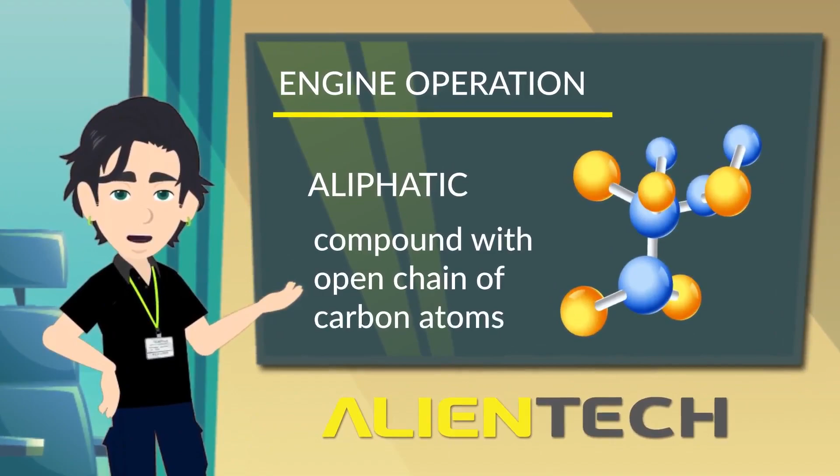Let's start by defining that diesel is a mixture containing aliphatic hydrocarbons from 13 to 18 atoms and paraffins. By aliphatic, we mean a compound in which molecules are made up of an open chain of carbon atoms. Paraffin, on the other hand, is a substance that freezes below 2 degrees Celsius, creating problems with the flow of diesel to the engine.

This prevents the fuel filter from functioning properly and clogs the fuel and injection ducts. If this problem occurs, it would be necessary to wait for the hottest hours of the day to start the engine. There are also additives, such as antifreeze, which dissolve the paraffin, making the diesel more fluid.

Keep in mind that fuels often contain impurities that filters are unable to completely retain. Therefore, the injectors tend to get dirty and clogged. If this happens, injection does not occur regularly, and we could encounter problems such as excessive fuel consumption, loss of performance, increase of harmful substances in exhaust gases, irregular idling, difficulty starting the engine, and in the long run, serious engine problems.

Consequently, we understand how important vehicle maintenance is in preserving the reliability and longevity declared by car manufacturers.

Diesel engines exploit compression to spontaneously ignite the air-fuel mixture. This is the theoretical basis of the process that initiates combustion. The engine needs a certain amount of air and fuel inside the combustion chamber in order to start combustion as efficiently as possible.

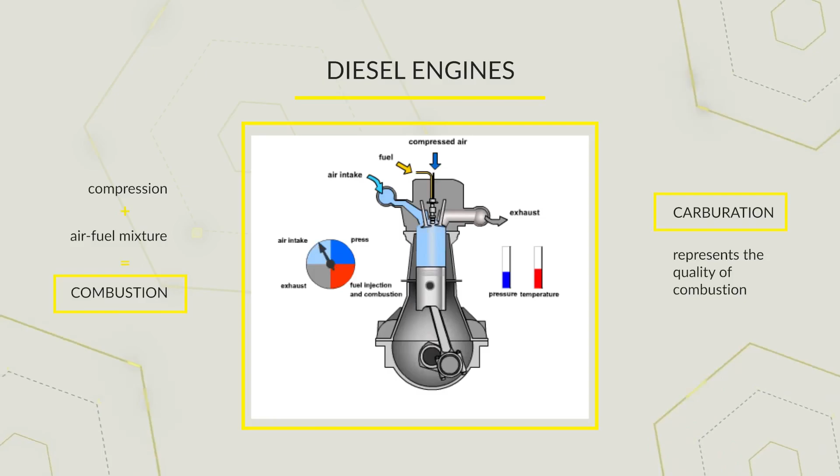To correctly balance the chemical reaction, we have a specific air-fuel ratio, which we represent this way. This simple division defines the mass of air necessary to completely burn a certain amount of fuel. This value is called the stoichiometric air-fuel ratio.

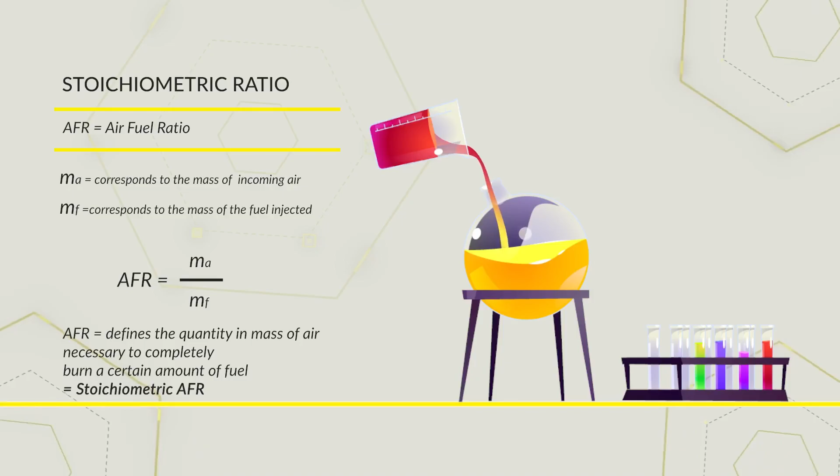By changing the fuel, there will be different stoichiometric, ideal air-fuel ratios. For diesel engines, this value corresponds to 14.5. So, to have complete combustion in a diesel engine, we need 14.5 kilograms of air to completely burn 1 kilogram of fuel. Translated into milligrams, we respectively need 14.5 milligrams of air for each milligram of fuel.

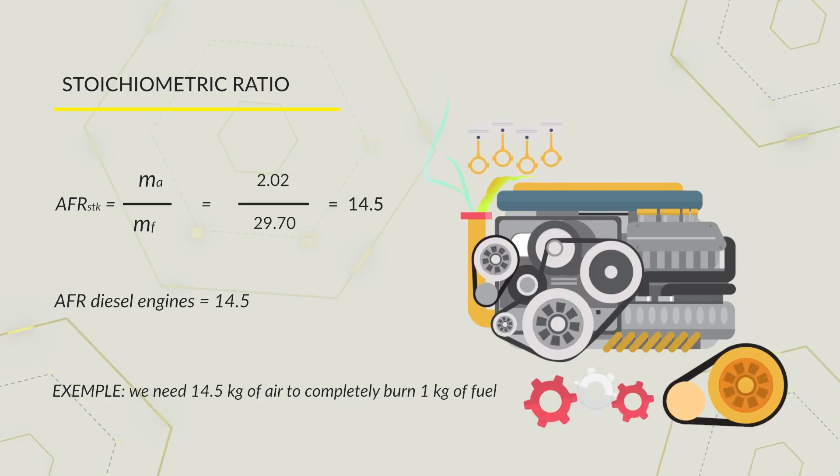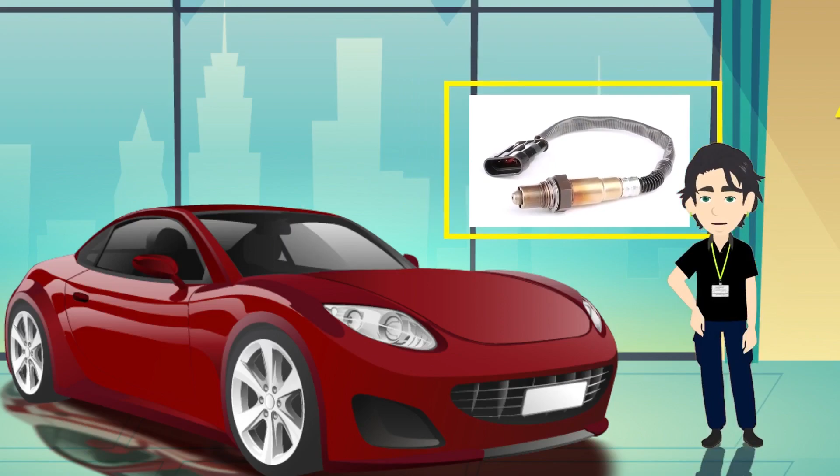Now you are probably wondering how our engine control unit measures these values and understands the amount of fuel needed. Simple: thanks to a sensor positioned in the exhaust manifold that measures the oxygen present in the exhaust gases, called the oxygen sensor, or more commonly the lambda probe. The percentage of oxygen remaining after combustion is detected, allowing the control unit to instantaneously calculate the so-called instantaneous air-fuel ratio, which defines the air-fuel ratio.

This allows the engine control unit to determine if there is excess air in the mixture, or if there is too much or too little fuel injected. The ECU reads this measurement and continuously adjusts the amount of fuel injected to keep the mixture as close as possible to the stoichiometric air-fuel ratio value, corresponding to 1.0.

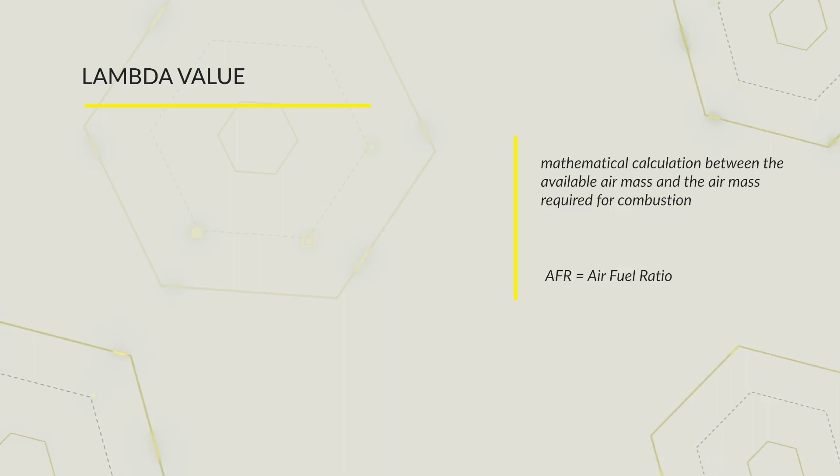The lambda value, by definition, is a mathematical calculation between the available air mass and the air mass required for combustion, calculated as a division between the instantaneous air-fuel ratio value and the stoichiometric air-fuel ratio value.

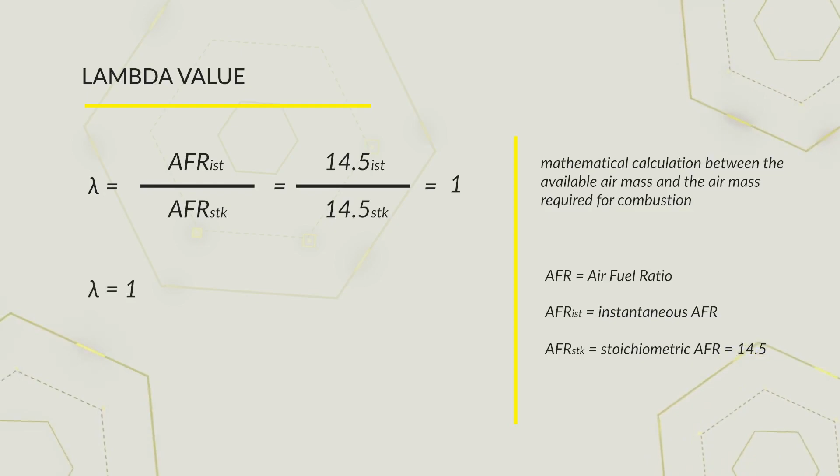Let's list in detail the lambda values that the ECU can calculate internally. Lambda equals 1 occurs when combustion is stoichiometric, or rather, all the fuel participates in combustion.

Lambda is less than 1: in this case, we have an excess of fuel, meaning unburned fuel in the exhaust gases, which creates more pollution. This is called rich carburation.

Lambda is greater than 1: here we have an excess of air compared to the injected fuel, and consequently high temperatures and a higher concentration of nitrogen oxides. It is defined as lean carburation.

Perhaps an example will help you better understand how the air-fuel ratio works, allowing you to apply the formulas discussed above.

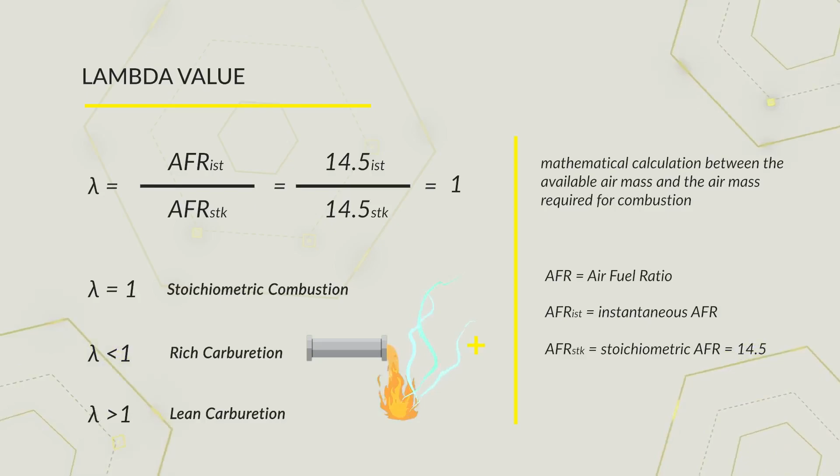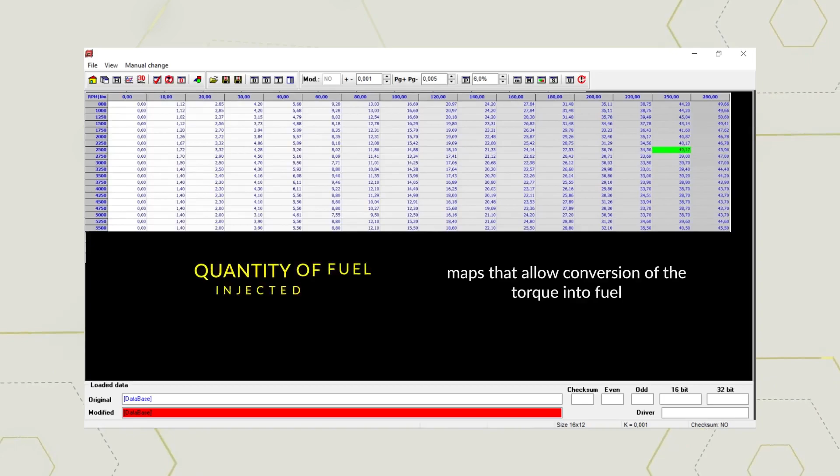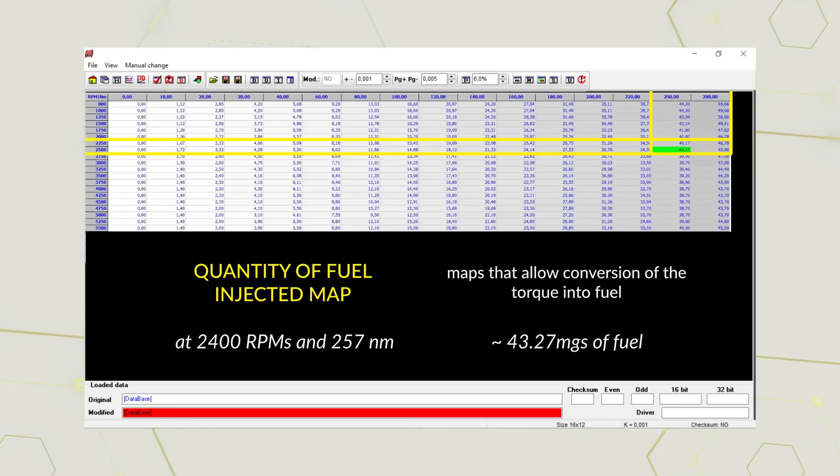We now understand how much fuel the ECU must control according to the engine torque to be generated. We check the maps that allow conversion of torque into fuel, called quantity of fuel injected. At 2,400 RPMs and 257 Newton meters, by interpolation between columns 250 and 280 Newton meters and lines 2,250 and 2,500 RPMs, we find about 43.27 milligrams of fuel.

Now let's open the map called quantity of air, which allows us to understand better. For 2,400 RPMs and 257 Newton meters, we find about 989.018 milligrams per stroke, by interpolation between 2,250 to 2,500 RPMs and 240 to 280 Newton meters.

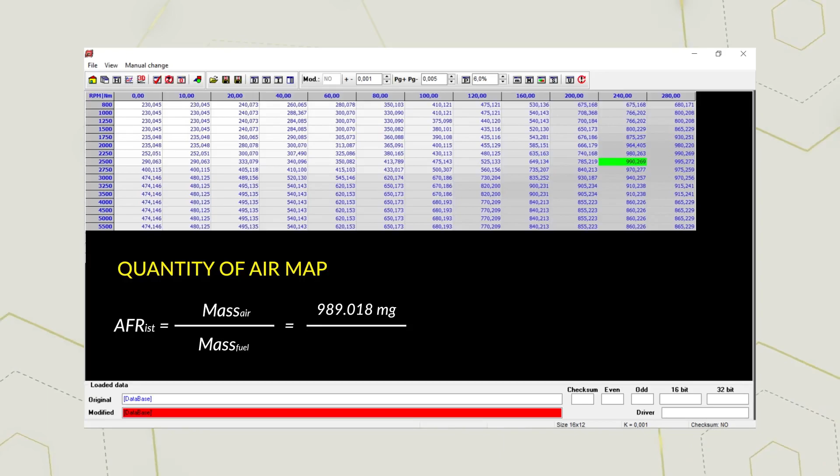Now let's apply the formulas seen above, dividing the milligrams of air we found, 989.018 milligrams, by the amount of fuel used, 43.27 milligrams, to get the correct instantaneous air-fuel ratio at 2,400 RPMs with 257 Newton meters. Now we can get the correct measured lambda value instantly, that is, 1.575.

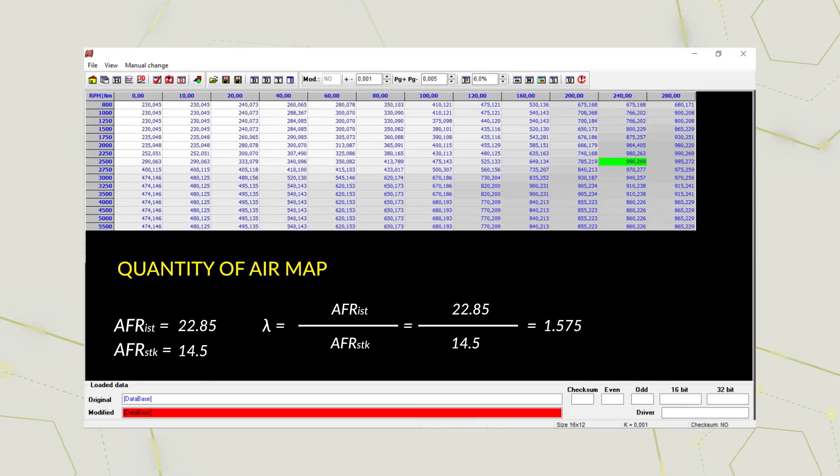You should know that one of the main problems of diesel engines occurs when the carburation is excessively rich. This means there is a lot of fuel in the exhaust gases. As a result, a very high level of particulate matter is formed, which would prevent automotive groups from complying with emission laws.

Conversely, using too lean a carburation will tend to produce more pollutants, such as nitrogen oxides. This carburation in some cases could also cause relatively low performance, as well as possible engine damage.

According to the various operating conditions, the ECU can mandate other injections in addition to the main one, in order to enrich or lean the carburation. Since this is a fundamental topic, we will better analyze the pre- and post-injections in another chapter of our training course. But it is important to understand why the ECU can use various carburations: to reduce emissions in order to pollute less and comply with emissions laws.

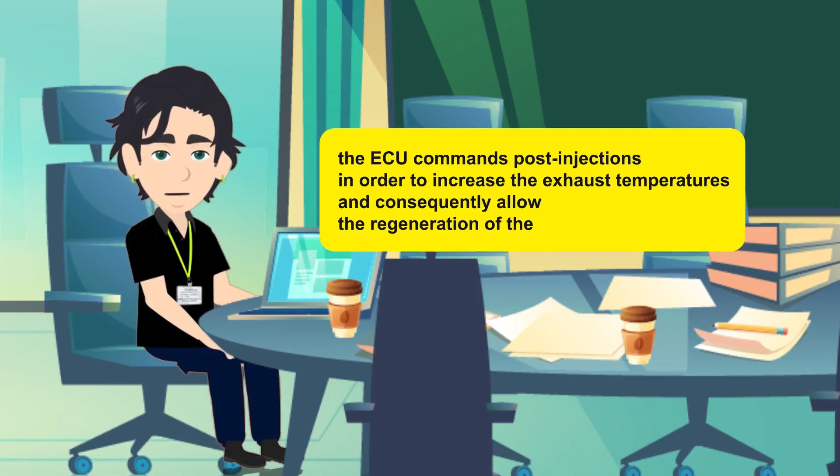The ECU commands post-injections in order to increase exhaust temperatures and consequently allow regeneration of the particulate filter. For consumption, if for example we stop at a railway crossing with the engine running, the ECU will try to limit consumption as much as possible by injecting less fuel.

To facilitate ignition, in the event of low or different atmospheric temperatures where ignition problems may occur, the ECU controls pre-injections by heating the combustion chamber to facilitate vehicle ignition. To increase or decrease the vehicle's performance, if we ask for more or less performance using the accelerator pedal, the ECU will command more or less fuel in order to increase or decrease performance.

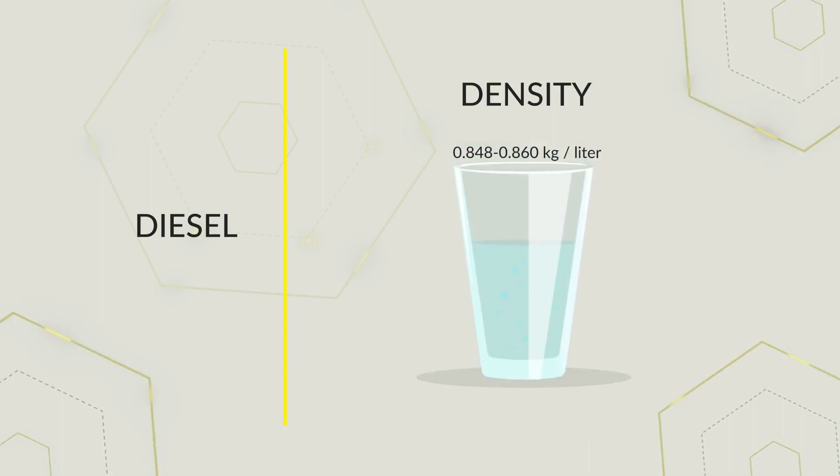Now that you understand why the ECU can use different carburations, let's talk about the treated fuel, which is part of the family of liquid fuels, diesel. The density is equal to 0.848 to 0.860 kilograms per liter. This means, for example, if we put the same amount of diesel in a glass of water with a density of 0.997 kilograms per liter, the diesel will float on the surface since it has less density, meaning it is lighter than water.

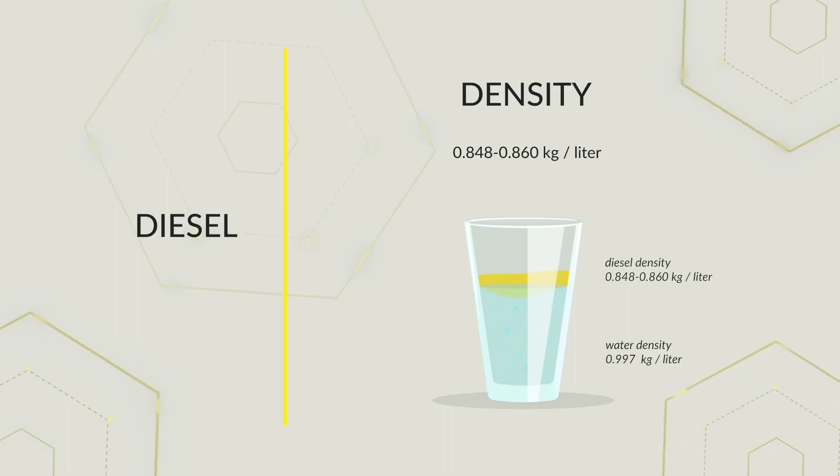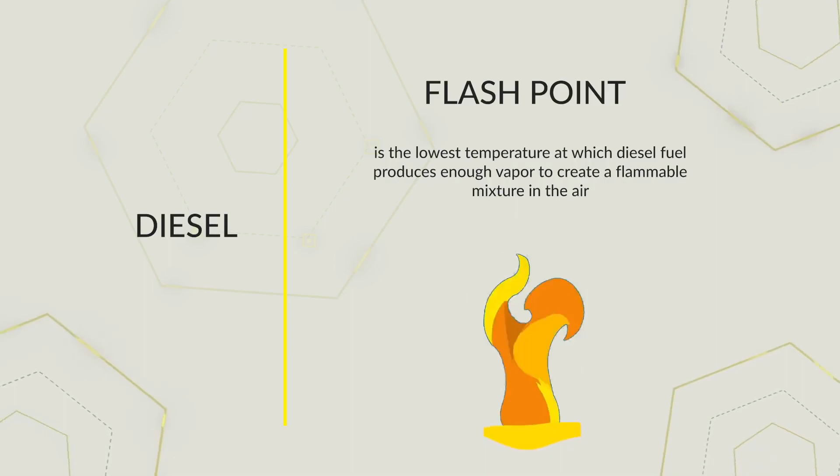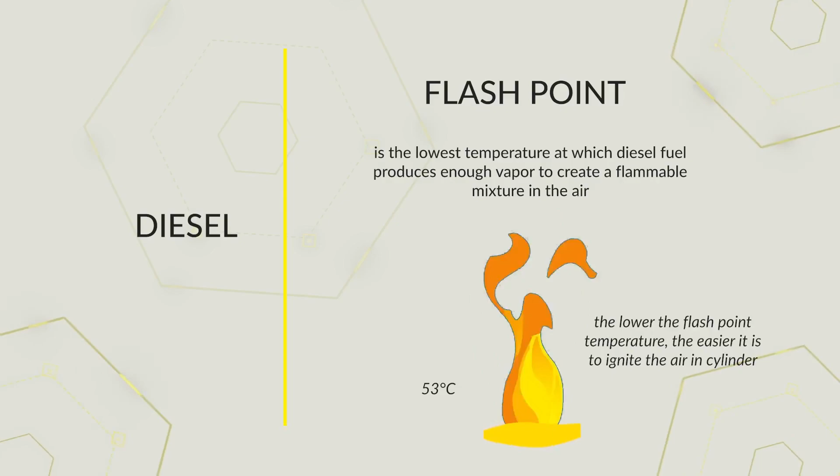The flash point is the lowest temperature at which diesel fuel produces enough vapor to create a flammable mixture in the air. The lower the flash point temperature, the easier it is to ignite the air in the cylinders. Conversely, the higher the flash point, the safer the fuel is to handle. For diesel, it appears to be above 53 degrees Celsius. So if the temperature of the diesel oil is lower than this value, ignition does not take place.

The calorific value is the quantity of heat, expressed in kilocalories, which develops from the complete combustion of 1 kilogram of fuel. The calorific value is the element that better than any other characterizes the value of a fuel. For diesel, it is 41 to 44 megajoules per kilogram.

Finally, the self-ignition temperature is the lowest temperature at which fuel ignites spontaneously in a normal atmosphere without a flame or spark. This temperature is necessary to supply the activation energy and thus start combustion. The temperature at which a chemical ignites decreases with an increase in pressure or oxygen concentration. For diesel, this happens when the temperature is higher than 210 degrees Celsius, about 410 degrees Fahrenheit.

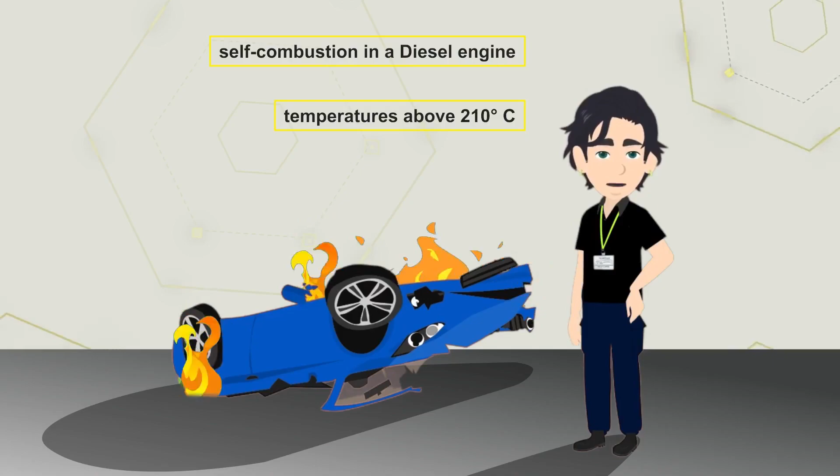Curiosity: when we talk about self-combustion in a diesel engine, it means that in extreme conditions, such as the vehicle overturning, breaking the turbine, excessive rise in the engine oil level, or a component near the fuel tank overheating and causing the fuel to reach temperatures above 210 degrees Celsius, self-combustion can occur. This is a very dangerous factor, since the flames become unmanageable as they are self-powered by the heat generated.

You must know that combustion in diesel is characterized by a lean air-fuel ratio to optimize engine operation. To avoid excessive formation of pollutants, the air-fuel ratio at maximum torque is usually kept around 20 to 25, well above the stoichiometric air-fuel ratio we saw earlier, corresponding to 14.5.

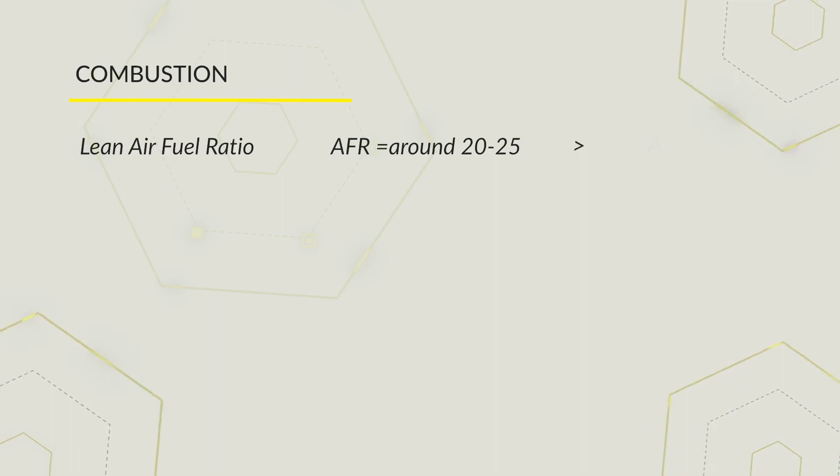The excess air present in the cylinder after combustion continues to mix with the active gases during combustion and with those already burned during combustion and expansion. It's good to remember that to vary engine speed, the ratio between air and diesel fuel can be changed. The more diesel fuel enters, the more powerful the combustion chamber will be, giving greater thrust on the crankshaft and an increase in revolutions per minute.

Furthermore, most of the air introduced into the cylinder of a diesel engine is compressed and heated, but it never intervenes in the combustion process. Excess oxygen in the air helps oxidize gaseous hydrocarbons and carbon monoxide, reducing them in the exhaust gases.

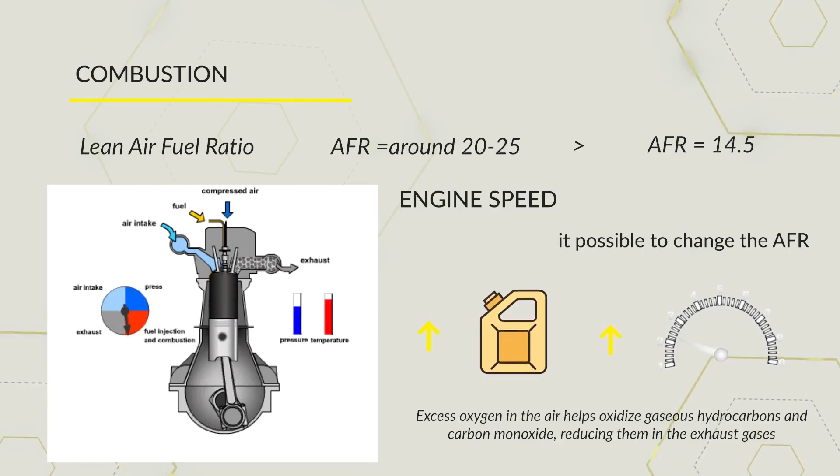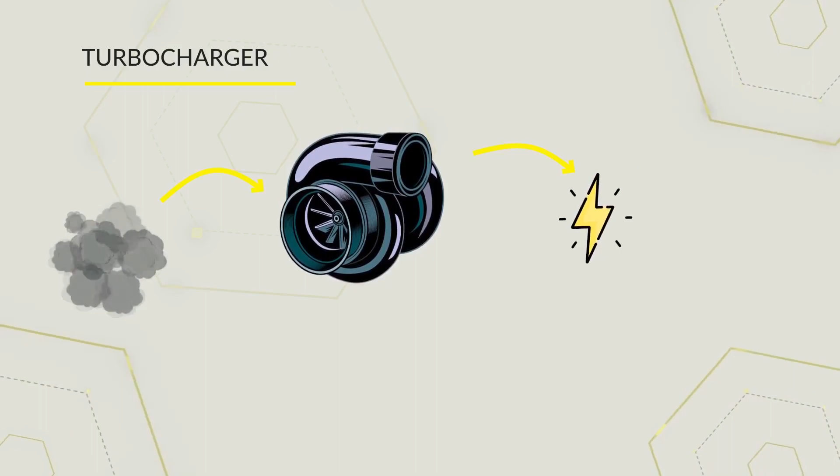It should be noted that, in order to always function with an excess of air, most diesel engines are equipped with a turbocharger. This recovers energy from the exhaust gases to use during intake. Once emitted, the exhaust gases generate energy which is transported to the turbine, whose mission is to recover part of this energy and return it to the compressor.

The air generated by the compressor is used to supply excess air, allowing the engine to run on lean carburetions. On diesel engines, we can find different types of turbochargers, but the one currently used is the variable geometry turbine, which regulates boost pressure at various driving speeds.

By changing the position of the vanes, the boost pressure varies because the thrust and speed of the exhaust gases changes according to the opening of the vanes. This leads to better pressure adaptability across all engine speeds and better driving dynamics than a fixed geometry turbine.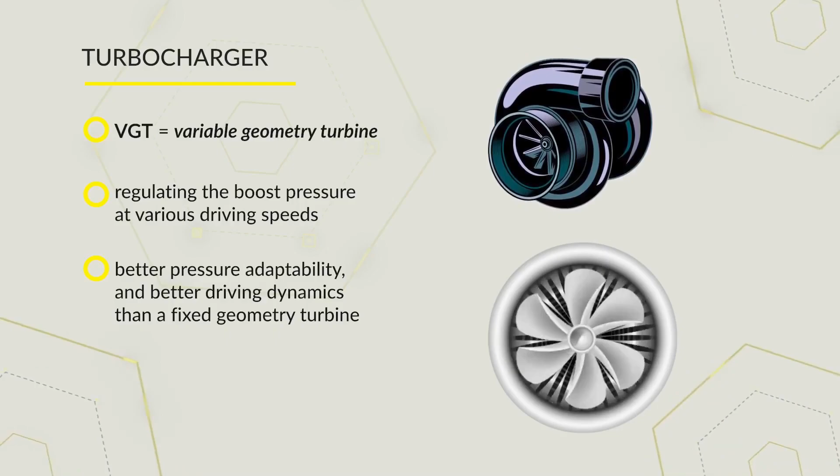We sometimes also find a wastegate valve which, pneumatically or electronically operated, decreases the internal pressure of the compressor.

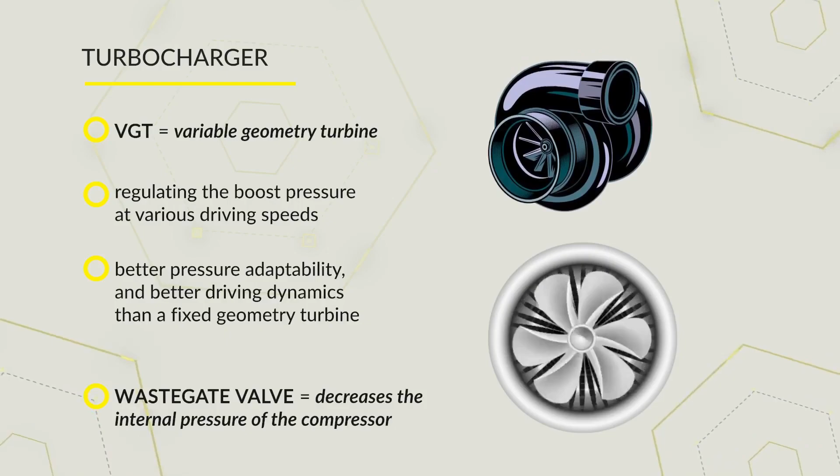Let's now analyze the consumption of some diesel engines, since when it comes to fuel, things are not always the same. One liter of diesel contains about 15 to 20% more energy than a liter of gasoline, which means a diesel vehicle would travel longer on a full tank.

But what about efficiency? Let's consider the difference in energy density of the fuel and the efficiency of the engine itself. The efficiency generated by a diesel engine is 20 to 25% higher than a petrol engine, meaning diesel allows you to travel more kilometers, consequently allowing considerable economic savings.

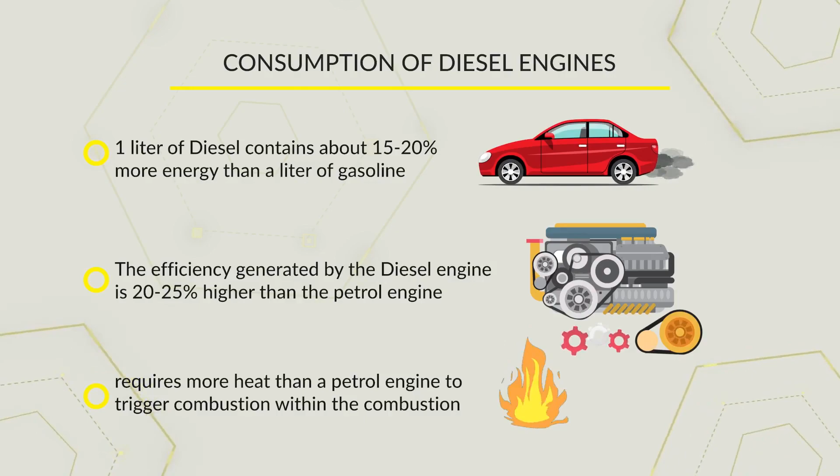Conversely, the heavy molecular structure of diesel requires more heat than a petrol engine to trigger combustion within the combustion chamber. However, exhaust gas temperatures of a diesel engine are considerably lower, in the 400 to 500 degrees Celsius range under normal operating conditions, while under the same conditions a petrol engine reaches 600 or 700 degrees Celsius.